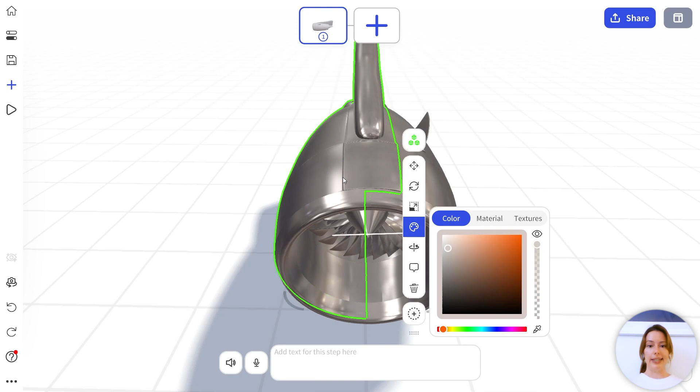In order for me to select these external pieces, I'm going to press and hold Shift in order to multi-select. I just need to click on a model again to remove it from my selection. But once we've got these outer components selected, I'm going to edit their color and materials and make them a white plastic.

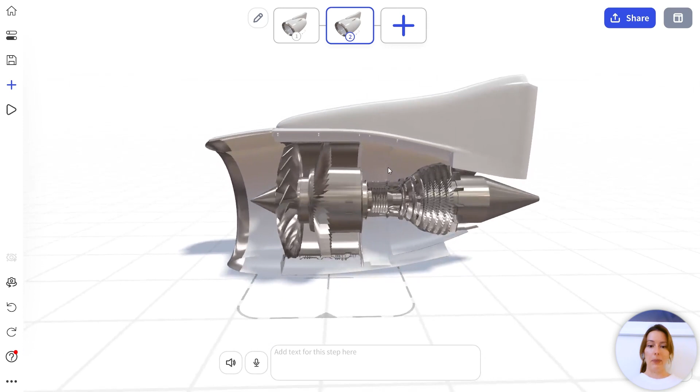Next, in order for me to edit the internal components, I'm going to add another step to our jig. I'm also going to select these external pieces and pull them aside and make them transparent too. This will allow me to edit and see these internal pieces. So I'm going to edit their colors and add a bit of diversity to the 3D models. This will give a better idea for people viewing the models, the different components that this jet engine is made up of.

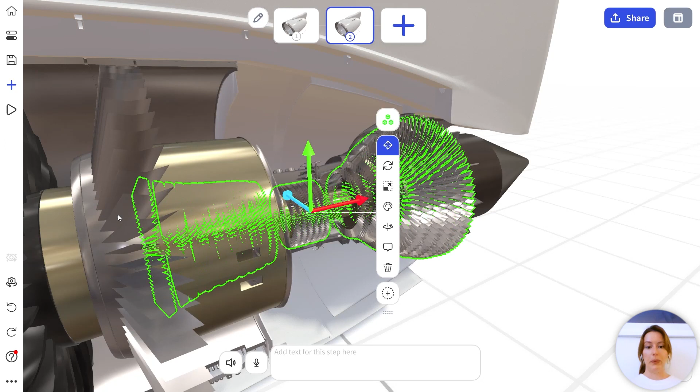I'm also going to make these internal turbines a more shiny chrome color. And our internals are completed.

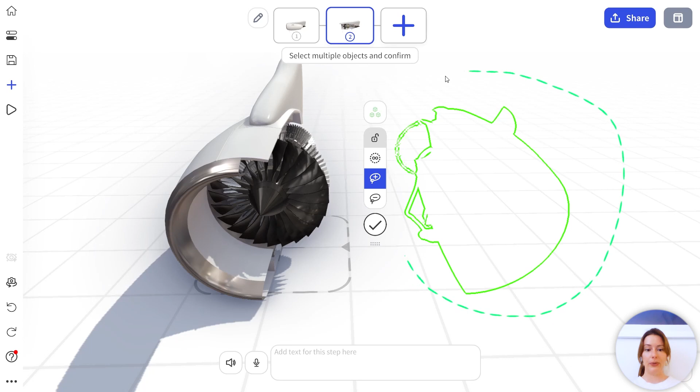Next, I want to copy the colors and materials from step 2 to step 1. But first I'm going to select these external pieces. To do this, I'm using the Lasso Add tool. This will just make sure that both of those models are added to my selection. I'm then going to turn off their transparency to make them visible.

Now when I swap into object mode, when I press and hold on the color tool, I open up our replicate menu. Any of the attributes I select in this tool can be copied across from step 2 to step 1. In this case, I just want to copy the color and material.

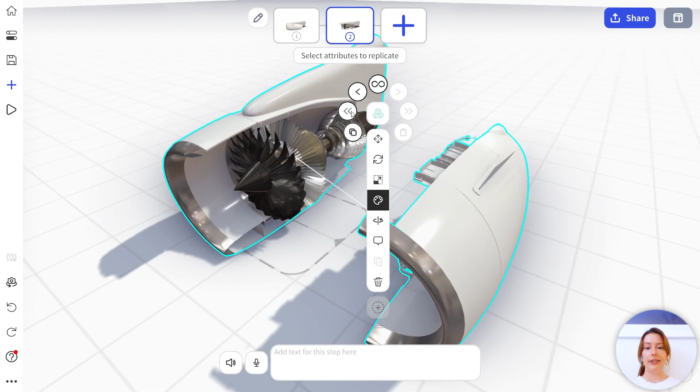I'm going to copy that to our previous steps, and you can see that's been applied to the previous step. So now when I go to step 1, you can see that these materials have been added to the internal and external pieces. So I'm able to remove step 2 and use step 1 as a base step.

Now to start off with, we have this 3D model of the jet engine. So with this object in our scene, I'm going to go to the object list. Once I open this up, you can see that we have our jet engine workshop model in this list. If I select this model in the list, you can see that it's been selected inside of that JigSpace 3D scene.

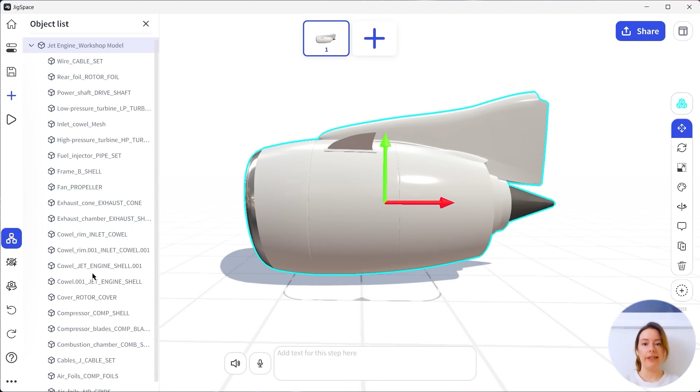Now I'm also able to use this drop down in order to reveal the individual meshes or sub-objects that make up this 3D model. And as you can see, I'm able to select the individual models inside of this jet engine in order to edit them.

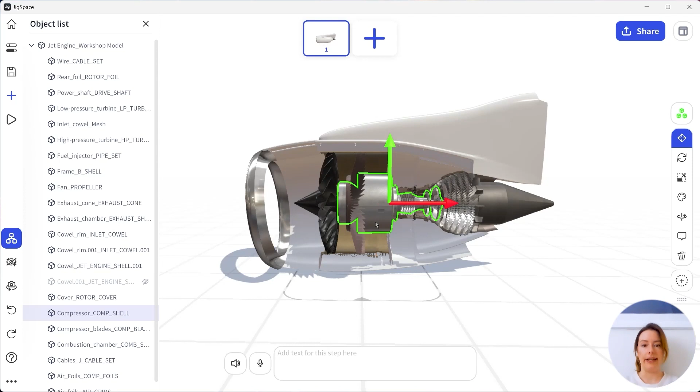You can see I'm also able to select this outer casing, and by turning on the hide tool, I'm able to turn off its visibility, and I'm actually able to select through this hidden model in order to select and edit these internal components. In this case, I'm going to add some spin to a couple of these internal pieces.

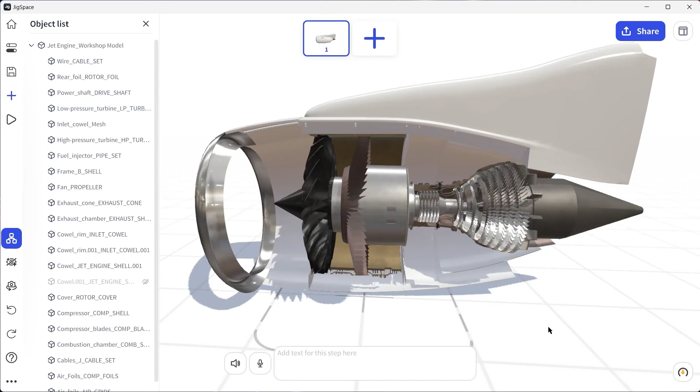Now in order for me to restore this outer casing, I just need to go back into the object list and turn off that hide tool. And now I've restored it to my original scene, but I have the added benefit of having applied spin to those internal components.

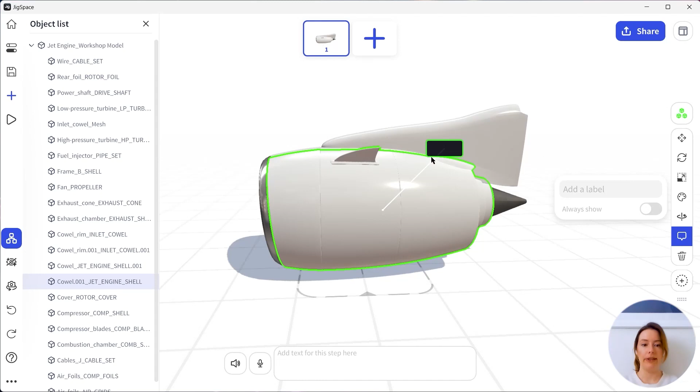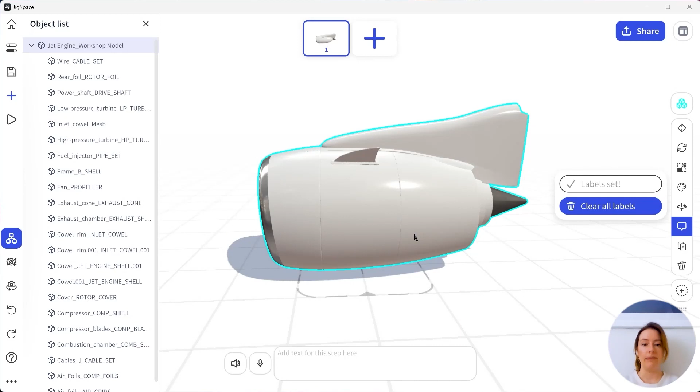Now if I wanted to select these objects and give them labels, you can see that this label field is currently empty, but another feature that we have available by swapping into object mode is the ability to use the names from files. So I'm able to take the names found in our object list that are a part of these 3D model files and apply them to the 3D objects in our scene as labels.

Now the Add Content menu has a number of different options to choose from. You can choose to import your own CAD files into your jig. You can select a 3D model from our model library or from your Team Objects library. You can also load an image or video into your jig, and you're able to bring in a 2D text object into your 3D space. Finally, we have the ability to save your currently selected 3D object into your Team Object library.

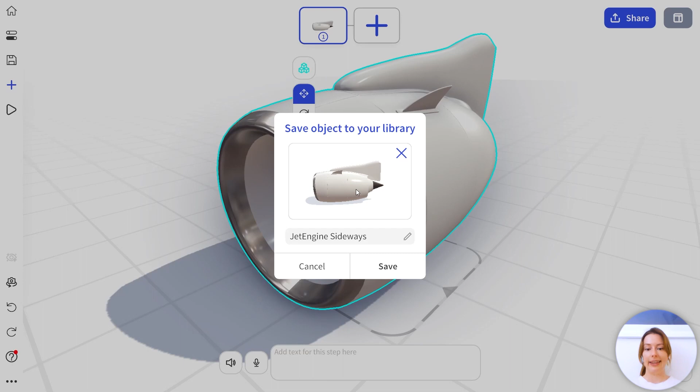So once we've applied our colours and materials to this 3D model, I can select our object and go to the Add Content menu and save our object to the 3D model library. I'm also able to move around this screen in order to get a clean thumbnail image, and I can edit the name of this 3D model.

So I'm going to press save, and I'm going to save this model to our Team Model library.

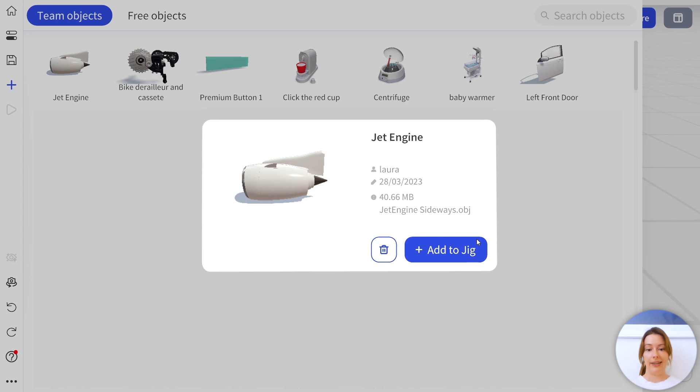And once this model has been saved, if I go to the Add Content menu and look inside the model library, you can see that inside Team Objects, our 3D model has been applied to our 3D model library. And if I click on this model, I'm able to add it to my jig, and it also contains a number of the different details relating to this 3D model.